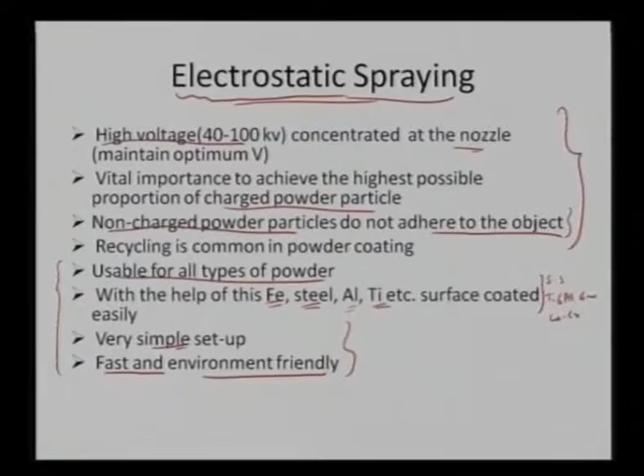So, we have a particular electrode. As powders are passing through it, they get charged. So once the charge is created on the powder particle, right now it is at higher potential, and then it progresses to the lower potential side, and we can have some fans or blowers which can allow the particles to attain certain velocity, or basically to flow from gun to the substrate.

So that is the overall philosophy here, that we apply a particular blower, it carries away the powder particles, and once it is carrying the powder particles, it will encounter the electrode which is centrally located in the gun, and that makes the powder particles get charged, and the flow of air which is blown from the other end carries away the powder particles. Now the powder particles are charged in nature, and once they strike the substrate, they can transfer the charge back to the substrate.

But in this particular process, all the powder particles have similar charges. So there is some sort of electrostatic repulsion, and that electrostatic repulsion is the cause of uniform dispersion of the powder particles. That's what happens in the conventional electrostatic charging system. Overall, it is one of the very simple processes, as we see here: we apply certain voltage here, and then that voltage is carried over by the electrode, which is facing the front portion of the electrostatic spraying gun,

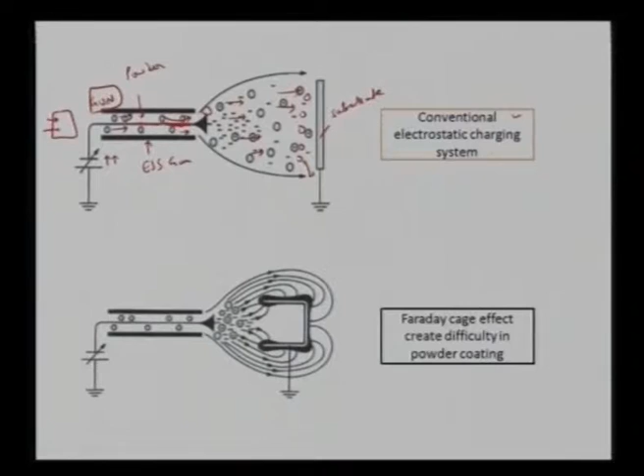But when there are certain crevices, say we had a particular implant substrate which has a certain cavity or some sort of a cage effect, what happens? As soon as powder particles start depositing on the front portion, they now have charge. They are now charged entities. And the second powder particle, instead of getting inside this particular cage, will experience a repulsion from the already deposited powder particle. So it will tend to find a new site for its deposition, and it can find an easy path of travel on the surface of this substrate, not inside of it.

So in that sense, the powder particles which are now charged will try to sit on the top surface rather than the inside surface. And if we want to coat the substrate from the inside as well, that becomes very, very difficult. Initially, a few powder particles can go inside, that will be fine, but as more and more charge deposits on the front portion of the substrate, it will be very difficult for the powder particles to squeeze through and get deposited inside to a larger extent. So that is called the Faraday cage effect, and that can create difficulty in the coating of a particular powder.

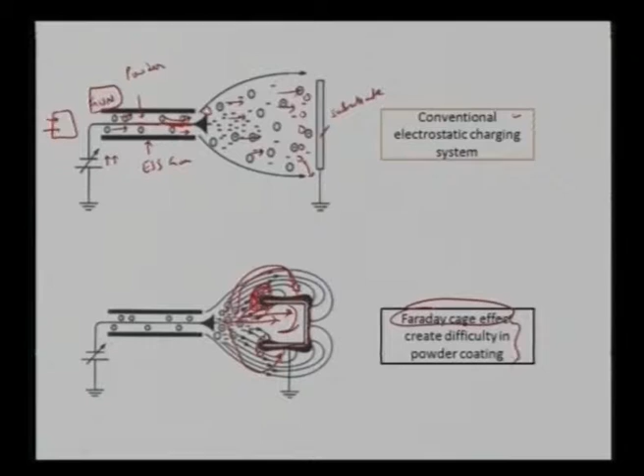So our overall aim is to create a biocomposite which needs to have enhanced mechanical properties, because if you are creating a particular biocomposite, we need it to perform much better than already existing coating materials. So if it is a polymer, we definitely want it to have higher wear resistance as well as higher scratch resistance.

And if possible, we would also want to extend these developed materials as real-life orthopedic implants. So we also need some sort of studies, in vitro and in vivo studies, for the confirmation of the biocompatibility or cytocompatibility of these particular coatings.

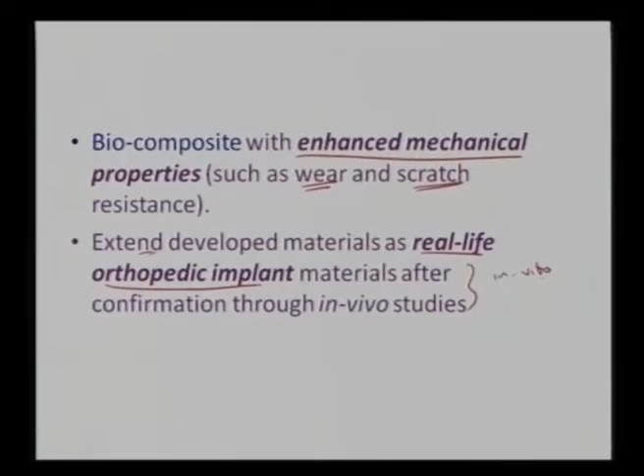And as we have seen in the earlier lectures, surface is one of the very critical components of deciding the cytocompatibility, because any particular environment will come in contact with the surface first. So that is the critical issue in terms of deciding the cytocompatibility. And if these coatings have to be utilized as superior, much more superior in terms of the mechanical and tribological properties, they also have to retain the cytocompatibility at the same time. Only then can we extend them to certain potential biomedical applications.

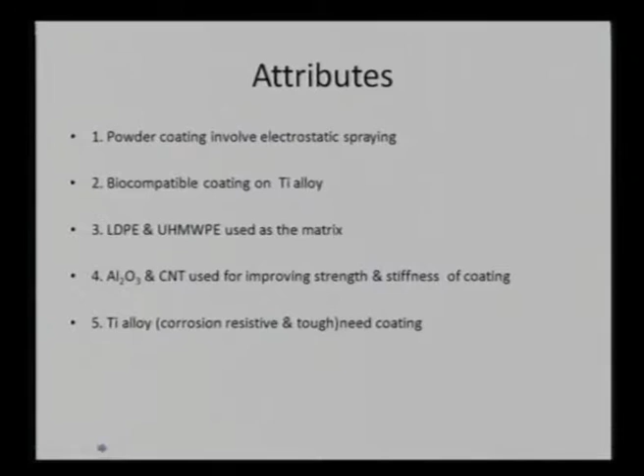So there are certain attributes to it. First of all, we are utilizing electrostatic spraying for the powder coating. Secondly, we know that they need some surface so that they can dissipate their charge. So for that, we need to have a metallic entity where the charges can be taken away. That is nothing but a metallic substrate, which can be titanium alloy, stainless steel, or cobalt chromium alloys. The only required criteria is that the substrate has to be conducting in nature.

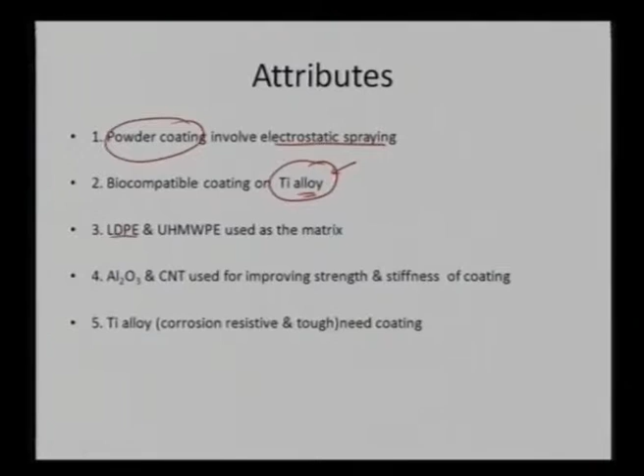Once we have that, we can utilize either low density polyethylene or ultra high molecular weight polyethylene as the main component of the coating. So we are going to deposit a coating which is rich in polyethylene. It can be ultra high molecular weight or low density polyethylene, and we can make that a major constituent of the coating.

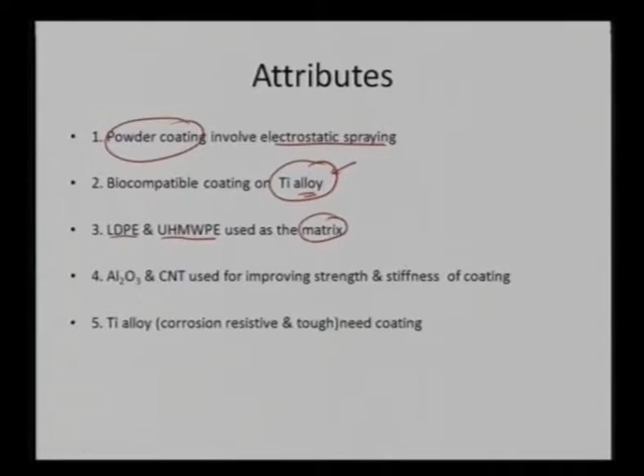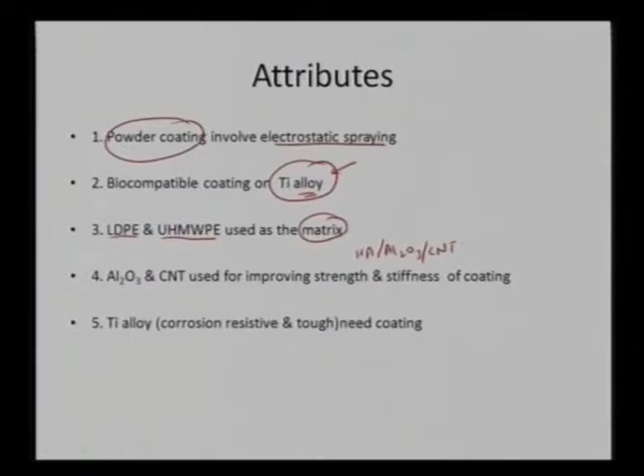And because these coatings are very soft in nature, we also want to increase their wear resistance or tribological properties. So for that, we can introduce hydroxyapatite, we can also introduce some ceramics, such as aluminum oxide, or we can incorporate carbon nanotubes for improving the strength as well as stiffness. So once we have much superior mechanical properties, we can expect that the wear or tribological properties will also enhance with the particular reinforcement.

And again, this particular one is much better because of its superior corrosion resistance as well as its toughness. So once we select a very appropriate biomaterial, we can always do a coating of polyethylene, which is still a biocompatible material, and we can enhance its strength by using reinforcements such as hydroxyapatite, alumina or carbon nanotubes. And their incorporation will vary depending on what kind of applications we are aiming at.

So we know that for the polyethylene matrix, conventionally polyethylene has been shown to be exceptional in terms of biocompatibility, such as in total hip replacements. In THR surgeries, polyethylene has been shown to be a very excellent biocompatible material. But the problem is that polyethylene can degrade over time. That might create some bone loss or hip implant loosening, because once we are losing material, it creates gaps or spaces between the implant and the bone.

So we want the polyethylene coating to survive for a very long time. Generally, we have ceramic balls and a polymer liner, which will always lead to much more degradation of the polymer. So if we want to improve the wear resistance or tribological properties of this polyethylene, we need to incorporate certain ceramics as reinforcement. In this particular case, we may want to create a porous coating so that cells can adhere, or depending on the applicability, we can also provide some lubrication in the porous coating. So that is the deal with this polyethylene matrix.

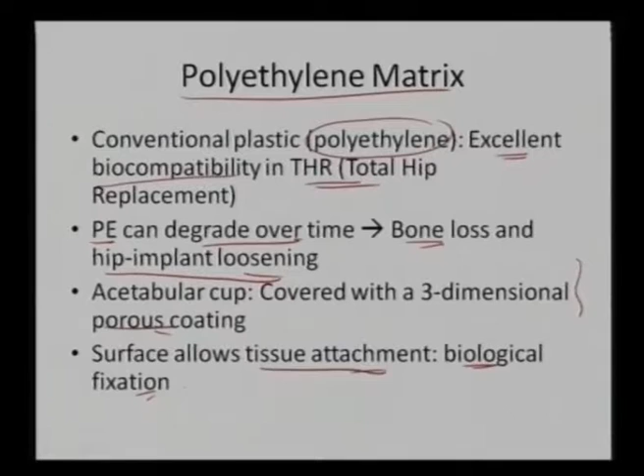At the same time, polyethylene can also allow for tissue attachment or biological fixation. So that is one more advantage of polyethylene: it can allow biological fixation and allow tissues and cells to grow onto its surface. So in this component, we are utilizing ultra high molecular weight polyethylene because it has been shown to be exceptionally cytocompatible in total hip replacements, and it is a very commonly used bioinert material for implants.

But the problem with this polyethylene is that it is limited to only soft tissues. Because of its lower mechanical properties, it is limited to soft tissue implants, and at the same time it has very low elastic modulus and low yield strength.

So to improve those particular properties in terms of strength as well as wear or tribological properties, we may want to add some hydroxyapatite. And hydroxyapatite has shown to be an exceptionally bioactive material. It has a close resemblance to bone and teeth because its calcium to phosphate ratio is 1.67, and because of its bioactive nature, it also supports bone growth. So in certain cases, when we want the bones to get reattached to the implant material and to provide a strong reinforcement, hydroxyapatite comes to our rescue.

So again, it leads to bone resorption and implant loosening in case we get a very poor crystallinity or generation of some secondary phases which are amorphous in nature. So that can also create certain problems in case the processing is not done properly. So a session has already been taken in terms of the overall processing of these bioceramics or even the bioglass materials.

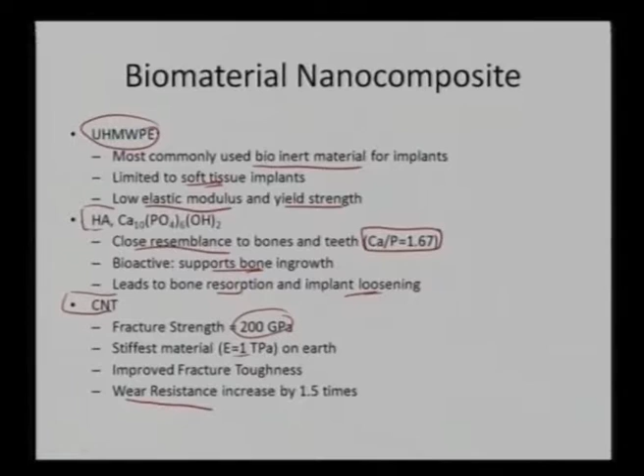So if we are able to reinforce it in a polyethylene matrix, it can result in improved fracture toughness. It will also induce improved strength. It will also improve wear resistance by approximately 1.5 times. So we can see such things have already been reported with the incorporation of carbon nanotubes.

So one more problem here is that our cortical bone has an elastic modulus from 7 to 30, and strength is approximately 50 to 150 MPa. Its fracture strain is only 1 to 3%. So if we want to match it, polyethylene has a modulus of around 1.25. Its density also is very similar to that of a cortical bone, approximately 1. Its strength is around approximately 104, which falls in range. It has a very high fracture strain, as we might require.

And if we start introducing some hydroxyapatite in terms of volume percent, or we start introducing some carbon nanotubes, we are seeing improvement in the mechanical properties in terms of its modulus, and that is now coming back into the regime of the modulus of cortical bone. So what happens is low density ultra high molecular weight polyethylene can start matching the modulus of bone once we start reinforcing it with certain ceramics. So that is the advantage it can provide.

Polyethylene is very light, so it can soon reach the density of a bone, approximately 1 gram per cc. Whereas hydroxyapatite or alumina itself have very high stiffness. So what happens with them is there is some bone resorption, because the body starts thinking that the overall load is being borne by the ceramics, monolithic alumina and hydroxyapatite, once we only have that as an implant. So bone starts thinking they are not really needed there, and because of aseptic loosening we can also see some resorption of the bone itself, because the overall load is being borne by some other material. So that can be a problem.

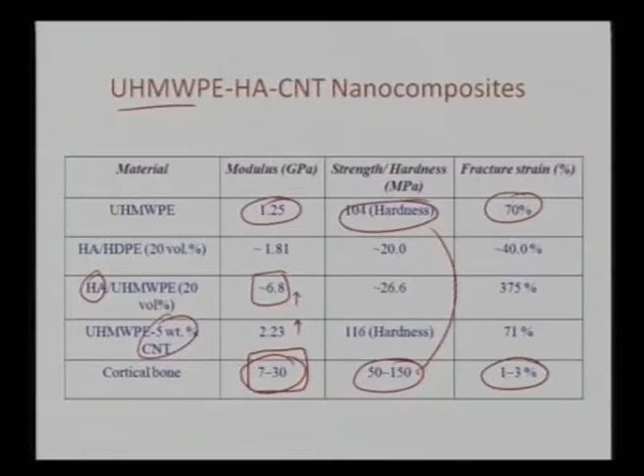That is the reason our polymer matrix can come to our rescue, in that it has a lower modulus and it can match the elastic modulus as well as the strength, and it can have a very superior fracture strain as well. That gives the overall importance to ultra high molecular weight polyethylene reinforced with hydroxyapatite as well as carbon nanotubes.

If they are isolated in some certain location, that particular regime can become much stronger. And also, if they are not dispersed properly, one region will become very weak. So it will also lead to some sort of straining or some sort of stress concentration at certain locations. So that might again be a problem.

Again, people do not know how CNTs or the carbon nanotubes will react once they are in the body environment. So there have been generally two schools of thought. On one hand, carbon nanotube is nano in nature, so it can penetrate through cell walls, it can create some damage, or it can get agglomerated, it can basically get accumulated either at liver or brain or even heart or some other location. So that can even create some problem.

And once anything is in nano form, and if it goes to our lungs, it is very hard for us to take it out. So it can be very toxic, depending on how the CNTs are being introduced into the matrix. But on the other hand, our body is also made up of carbon. So why would carbon be deleterious to our own body?

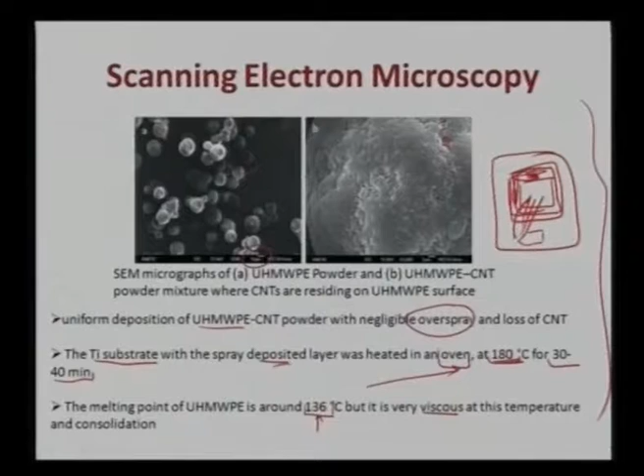In this particular case, the melting point of polyethylene is around 136 degrees centigrade, but it is very viscous at this temperature. So when we want the polyethylene to flow, we need to superheat it to a much higher temperature than 136 degrees centigrade. So here we are heating it to around 180 degrees centigrade, so that it is fluid enough to cover the overall surface of the titanium substrate. So that is the overall deal with the deposition of CNT reinforced polyethylene using electrostatic spraying.

And once we fracture those samples, in the first case when we have only polyethylene, and in the second case once we are reinforcing it with some carbon nanotube. So what we can see here is, once we have only polyethylene, no CNT, we are seeing a very flat morphology.

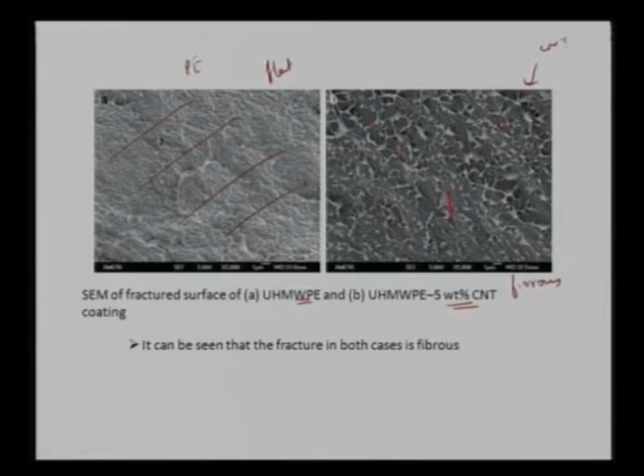But once we have some carbon nanotube, we can see all those dimples, a very fibrous kind of fracture out here. So in this case it is very fibrous, in this case it is a very flat fracture. This directly tells that my coating, which is now reinforced with carbon nanotube, is much more ductile. So that's what is giving me much more advantage, that I can have a very adherent coating, very nice coating, and that also has much higher fracture toughness.

At the same time it should show very good mechanical properties. Because what is happening here is we want the surface to yield once it is undergoing some stresses. So in that particular case we can see that with CNT I am getting a much more fibrous coating which can basically shear off or deform with a particular applied load, and it can sustain a much longer time.

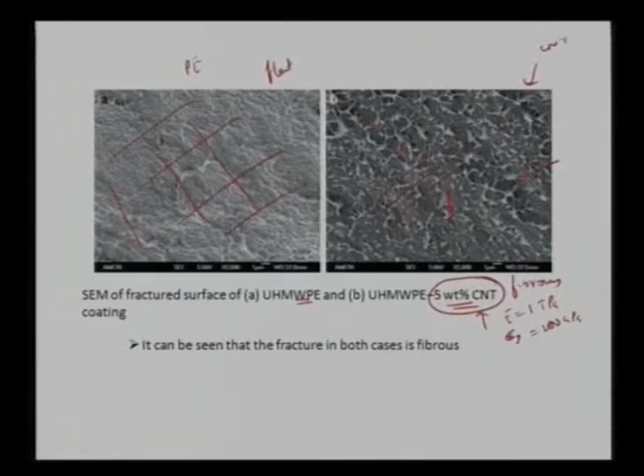So that is the advantage with the addition of carbon nanotube, because carbon nanotube has exceptional mechanical properties: Young's modulus of around 1 terapascal, fracture strength of around 200 gigapascals. So that is the advantage of utilizing carbon nanotube as a reinforcement. At the same time it is also assisting formation of a fibrous structure, which can provide us much more stress absorption in many cases.

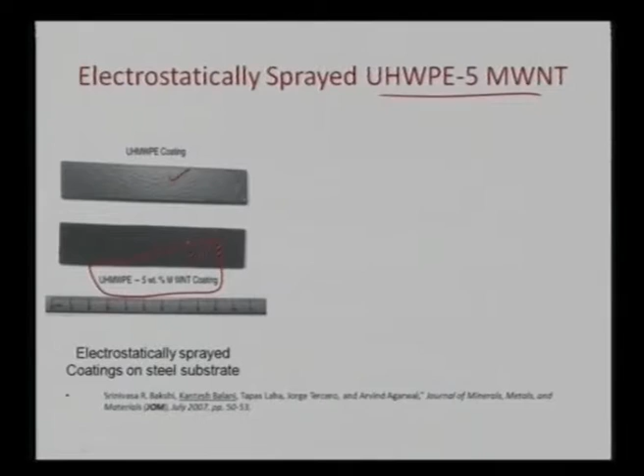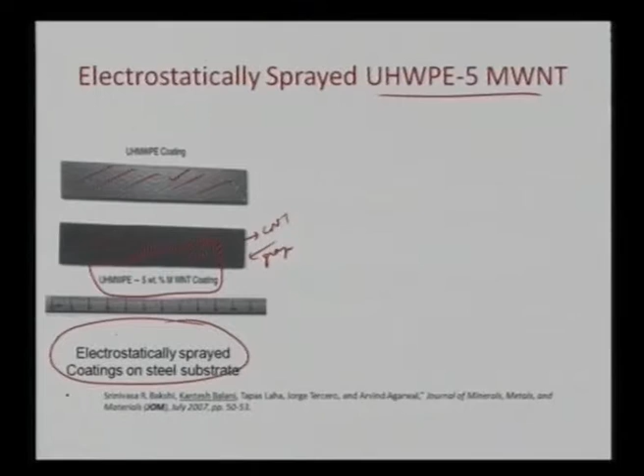This is how the coatings look like. In this case we have utilized only polyethylene with some carbon nanotube. So in this case we have ultra high molecular weight polyethylene, and we have around 5 wt.% of multi-walled carbon nanotube, and the coatings show a very smooth surface finish, as we see here. And in this case, because of CNT, we are seeing a little greyish coating, and these coatings are electrostatically sprayed on the steel substrate. In this case, we utilize a steel substrate, not really titanium substrate, but we can see the overall feel of how the coatings are deposited using electrostatic spraying.

And correspondingly, as we have seen, the fracture part was very different. So in this particular case, with the reinforcement of 5 wt.% multi-wall carbon nanotubes, we are seeing an increase in the elastic modulus by approximately 10%. That is again very substantial, because we are using only 5 wt.% of CNTs, and that is enhancing the mechanical properties or the elastic modulus by around 10%.

At the same time, we can also see improvement in the hardness. This is very marginal, but we can see there is an overall general increase in both the hardness as well as the elastic modulus, marginally, but we can see there is some sort of influence of carbon nanotube reinforcement in the ultra high molecular weight polyethylene matrix.

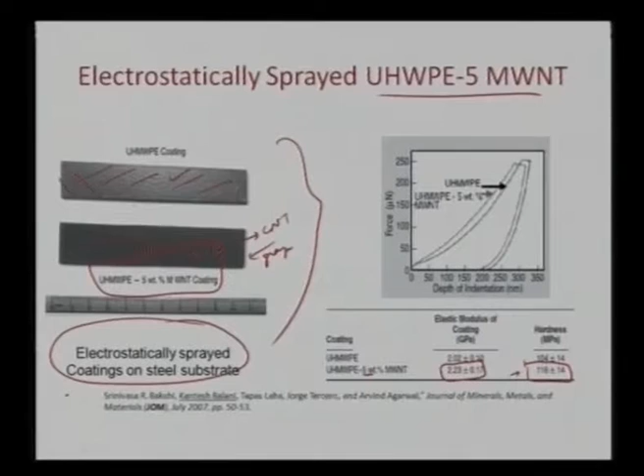So that is what we can see, that electrostatic spraying coatings are very smooth. So we can utilize them as such, because they have a very smooth surface, and aesthetically also they look very good. So we can utilize all these coatings as such in the implant, while they are showing the improvement in the mechanical properties.

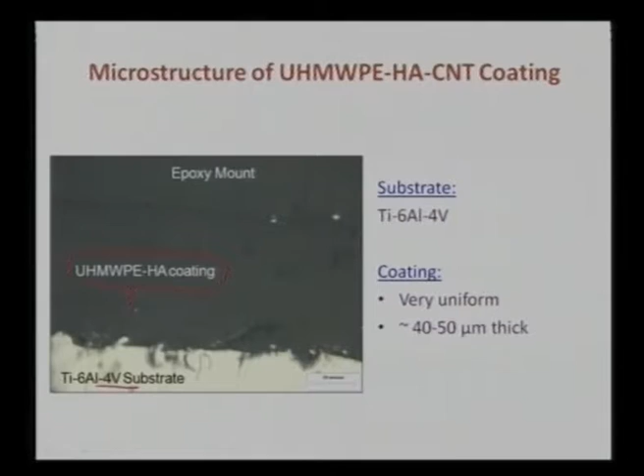Now coming next, we can see that in the second case, we have ultra high molecular weight polyethylene with hydroxyapatite coating. So in this particular case, we have a titanium 6 aluminum 4 vanadium substrate, and over that we have electrostatically sprayed this coating, which is ultra high molecular weight polyethylene reinforced with some hydroxyapatite.

And we can see one very nice observation, that the coating is very uniform. This particular coating is very uniform. The interface is very adherent. We can see out here there is no cracking at the interface. So the interface between the substrate and the coating is very strong.

And later on, this particular part was sectioned and mounted. So we have this epoxy mount, which has captured the coating as well as the substrate. So we can see in this case the coatings are very uniform, approximately 40 to 50 micrometers thick. But the main part is, it is very uniform. We can achieve approximately a constant thickness or a very smooth surface utilizing this electrostatic spraying.

So that is the basic advantage of electrostatic spraying: I can achieve very uniform coatings on a metallic substrate. And mostly all our implants are metallic in nature, because they need to render enhanced fracture toughness, enhanced fatigue life, and such. Basically, they have to take care of the wear and tear and work as the workhorse material. So in that particular case, this process can highly be utilized for electrostatic spraying of certain polymer coatings.

So that part we can see here, that we can achieve a very nice uniform coating on a metallic substrate, which is a titanium 6 aluminum 4 vanadium substrate, and I can achieve a good interface. So I have a very good interface without any cracking.

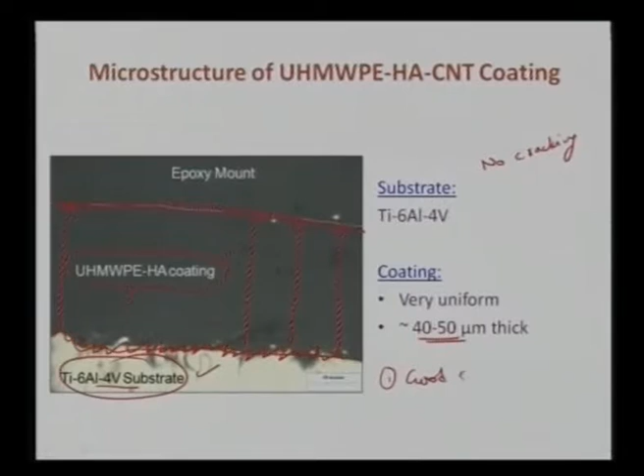Coating is highly adherent coating. And third thing is, I am achieving a very uniform coating thickness. So these are three very nice components which we can really see here, that I have a very good interface, coating is highly adherent, it is not peeling off, and I have a uniform coating thickness. So in that particular manner, I can really see how much coating I really require out here.

But one problem with this electrostatic spraying is, I cannot achieve very high coating thickness, which can exceed say 200-300 microns or so, because my substrate needs to be very highly conducting. Once I achieve a certain thickness of this powder, later on it is very hard for me to keep developing powders on a charged surface, because once we melt the powder it becomes insulating, and powders themselves have some charge, so it will not allow charge to keep accumulating with the electrostatic spraying.

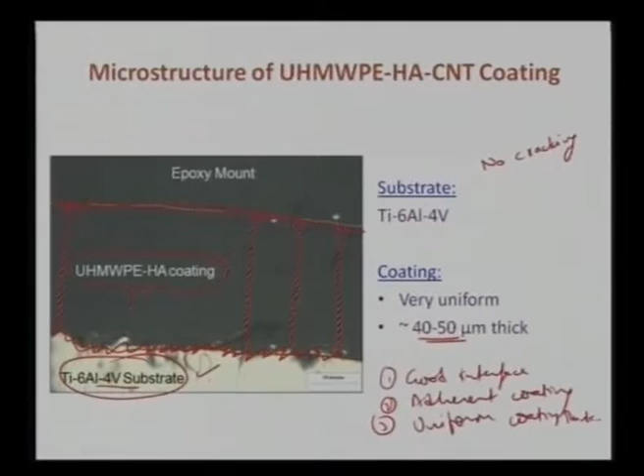So I keep the substrate, I deposit certain thickness of powders. It is not limitless, the process is not limitless. I can achieve only very fine coatings, which can be limited up to say around 150 to 200 microns and not more. That is a disadvantage of the process, but it becomes an advantage for this particular biocompatible coating, because we can achieve very fine, adherent and uniform coating on a particular metallic substrate.

So the overall feel of it is that the first step is the processing of this ultra high molecular weight polyethylene, which is now reinforced with hydroxyapatite and carbon nanotube, and then once we have synthesized those coatings, we need to have some sort of in vitro biocompatibility test, that can come from either cell culture or bacterial culture studies. Once we have done that, we will know what are the potential materials for which we can expect much more enhancement in the mechanical properties.

So for that we can either do nano scratching, we can do fretting, we can also do ball-on-disk testing. And once we can see how we are getting the enhancement of the mechanical properties, we can come to the process optimization by electrostatic spraying in terms of hydroxyapatite content, in terms of any other reinforcement we require. And some other component which might be essential is what might be happening at either the CNT-HAP interface or the polyethylene-HAP interface or the polyethylene-CNT interface. So there can be certain components which can be answered via some computational modeling.

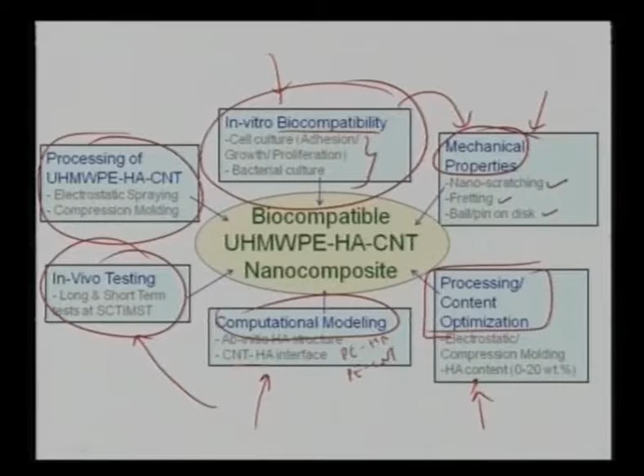At the same time, once we have confirmed from in vitro, from mechanical properties, from the optimization of the composition, we would also want to know what is happening in vivo in terms of both long term and short term tests. So that part also might become very critical in terms of evincing the overall biocompatibility of polyethylene, which is now reinforced with hydroxyapatite and carbon nanotube.

So in this particular case, we can see the overall pyramid of this CNT reinforced ultra high molecular weight polyethylene with hydroxyapatite. So there are certain criteria to it. First thing is the nanocomposite processing. So we have to optimize the process and then synthesize a particular coating or do the spraying part. Then the second part is the mechanical properties. So we would want to know what is happening in vitro and in vivo, and also what is happening to the wear or the tribology of this particular coating, so we can finally select the coating.

And further we would also want to know what is the overall effect of the composition in terms of how the reinforcement is being given by either hydroxyapatite or carbon nanotube, how those phases are distributed. So microstructurally also we need to look at their distribution, how the phases, both hydroxyapatite as well as carbon nanotube, are being distributed in the polyethylene matrix.

Then at the same time, what is happening between the interfaces of all those? It can be hydroxyapatite and carbon nanotube. It can be polyethylene plus hydroxyapatite. It can be polyethylene plus carbon nanotube. So there are certain areas where we would want to look at the overall interfacial compatibility. So this forms the overall pyramid of processing.

How do we process it using electrostatic spraying and be able to optimize first the process, then the composition, and then once we optimize the composition, we would want to look at the mechanical properties. So what is happening at the interfaces, how the phases are now being distributed, and then coming on to the in vitro and in vivo testing, so that we can choose them as potential biomaterials. So this is the overall strategy of developing ultra molecular polyethylene, which is now reinforced with hydroxyapatite and carbon nanotube.

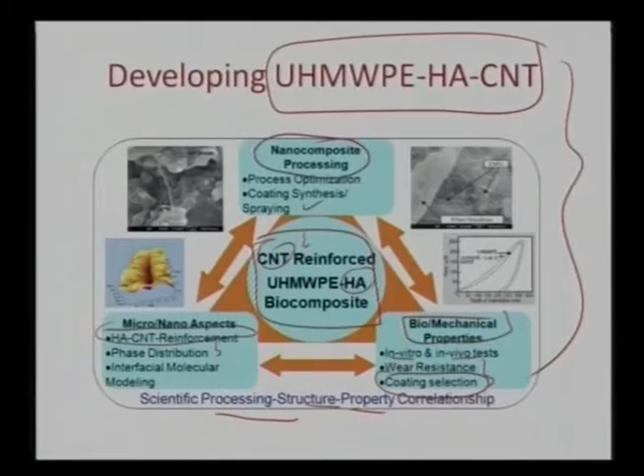So that is the overall scientific processing-structure-property correlation which becomes essential. So that is the overall deal with the development of ultra molecular polyethylene with hydroxyapatite and carbon nanotube. And most importantly, interfacial wear is also one of the very critical components, because once we have surface 1 and surface 2, how do they interact, how is the overall roughness, the overall chemistry, the overall lubrication between the two surfaces will result in how my material will be lost once I have two operating surfaces.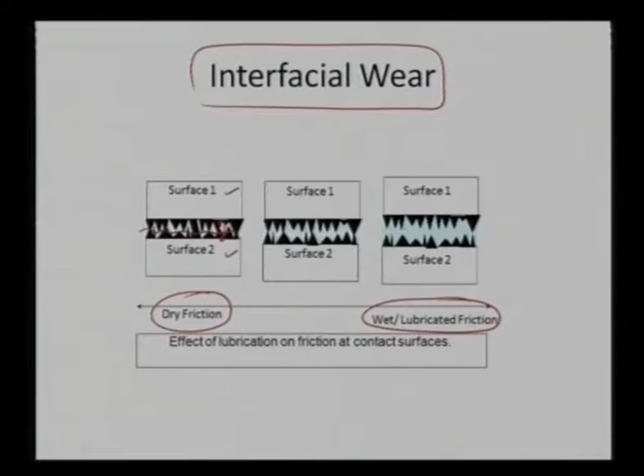So I can have a dry friction once I don't have any particular fluid, or secondly I can also have a wet or lubricated friction. So in this particular case I have some hydrostatic film which can form between the two surfaces, and once I have some film forming between those two, it is only the film which can easily shear off, and once it is shearing off, I will achieve a very low coefficient of friction because the surfaces will flow very smoothly over one another. Whereas in case of dry friction, I don't have any sort of lubrication.

That's how the porosity also comes into the picture: once my surfaces are very dry, they will always have some ridges and grooves, because no surface is atomically flat. So that's how it will lead to some sort of contact between the asperities. Once the asperities have lengths of microns to nanometers, it will always lead to some sort of friction between those two surfaces. And once I have certain friction, it will interlock all those asperities, and with the particular movement, it will start breaking off all those asperities. So eventually, I would want to introduce some sort of lubricant to avoid this friction, so that the surfaces can flow very smoothly over one another.

In this particular essence, when I have much easier shear, I can introduce some carbon nanotube, or I can introduce some ceramic particles, so my wear basically goes down to a very large extent. Hydroxyapatite is ceramic in nature, so the abrasion resistance once I have a hydroxyapatite reinforcement will always be much more superior to that of polyethylene alone. Again, it also depends on the interfaces. If I have a very poor interface between hydroxyapatite and polyethylene, then hydroxyapatite can also come out, and it can start eating away my polyethylene. So I need to have a very strong interface between polyethylene and hydroxyapatite.

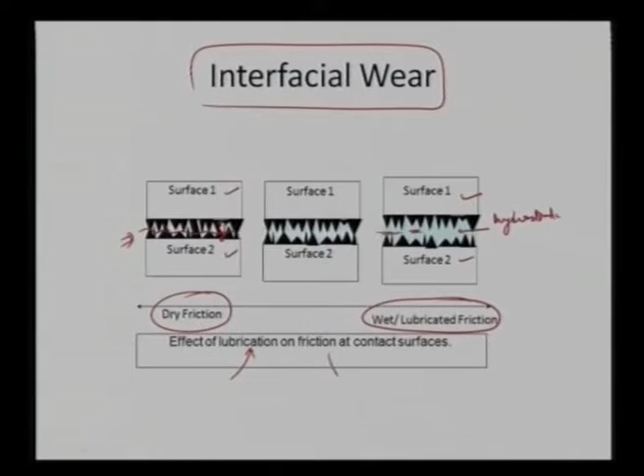CNTs, on the other hand, are much more graphitic, and graphite is also used as a lubricant. So depending on how the interface is between CNT, hydroxyapatite and polyethylene, I can somehow control my wear or the tribological properties. At the same time, I can also provide some sort of lubrication at the contact surfaces to decide the overall wear of a particular interface. So we can see how the composition itself can be much more influential in dictating the overall wear between the two compositions.

In this case, we will see that we have done a nano scratching of ultra high molecular weight polyethylene, which is now reinforced with hydroxyapatite and carbon nanotube. So in this first case, we only have polyethylene. In the second case, we have reinforcement of some hydroxyapatite. So what we can see here is that I have a nano tip.

Then what I am seeing here is the wear volume, which is now calculated by the volume of material being displaced by the indenter tip, both in polyethylene as well as in the polyethylene which is now being reinforced with hydroxyapatite. So we can see I have certain wear volume in polyethylene, but once I am reinforcing with some ceramic, I am getting much higher wear volume.

That is much more contradictory, because once I am reinforcing my polyethylene with certain ceramic, I will expect the wear volume to go down. But what is happening here is that the interface between hydroxyapatite and polyethylene may not be that good. So hydroxyapatite is probably loosening away, and that again is acting as a scratching media for the polyethylene. That is the reason I am seeing much higher wear volume once I am reinforcing with hydroxyapatite.

But once I start introducing some carbon nanotube, like 2 weight% and 4 weight%, I am seeing much reduction in the wear volume. This is happening because carbon nanotubes have very superior mechanical properties. They also serve as a lubricant. They have exceptionally superior wear properties, tribological properties, mechanical properties. At the same time, they have much more lubricating properties. So once I am introducing more carbon nanotubes, I am seeing an overall reduction in the wear volume.

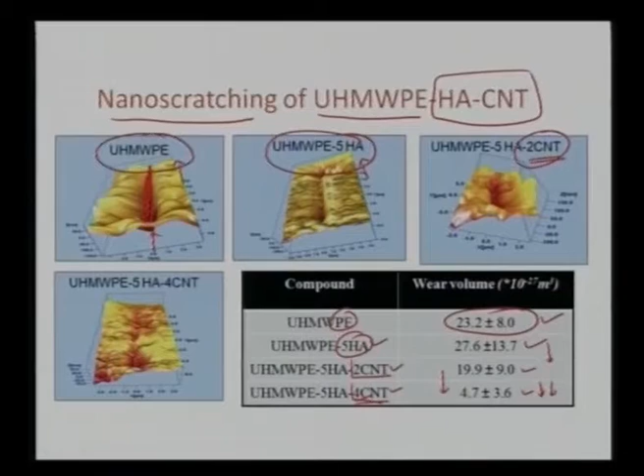That is what we can see, that once we have a poor interface between hydroxyapatite and polyethylene, I am seeing much enhancement in the wear volume, or my wear resistance is dropping off. But once I start reinforcing with carbon nanotube, I am seeing much more enhancement in the wear resistance. So my wear volume is basically going down with the increased CNT content, and that is what is happening with the nano scratching in this particular case.

At the same time, I can see with the increase in the hydroxyapatite, I am seeing increase in the Vickers hardness. That can be expected, because hydroxyapatite is ceramic. Once I am adding some ceramic, obviously my hardness should go up. And with further increase in the carbon nanotube, I am seeing a marginal increase in the hardness as well. So we can see here that wear volume is decreasing with increasing CNT content.

So obviously my CNT is improving the wear resistance. Once I am saying that CNT is a lubricant, I should expect that my coefficient of friction should go down. But we are seeing exactly the opposite. In this particular case, the coefficient of friction is going up with the CNT content. First of all, I had polyethylene; it was showing me some coefficient of friction. Once I am adding hydroxyapatite, I am seeing decrease in the coefficient of friction.

That is happening because at nano level, once I am doing a nano scratching, there is very poor interface between hydroxyapatite and polyethylene. So as soon as I am putting my indenter tip, it is very easy for the indenter tip to plow away the material on the side. So there is very less lateral force in comparison to the normal force. That is the reason I am seeing much reduction in the coefficient of friction for the 5% hydroxyapatite.

Whereas once I am adding some carbon nanotube to it, CNT is introducing much more strength to the polyethylene matrix. They have very superior mechanical properties. So the indenter tip finds it very difficult to displace the material. At nano level, things are very different, and it finds it harder to displace the material. So lateral force goes much higher. That is the reason we can see increase in the coefficient of friction with more CNT content. So it is in agreement with the observed wear volume loss in the nano scratch testing.

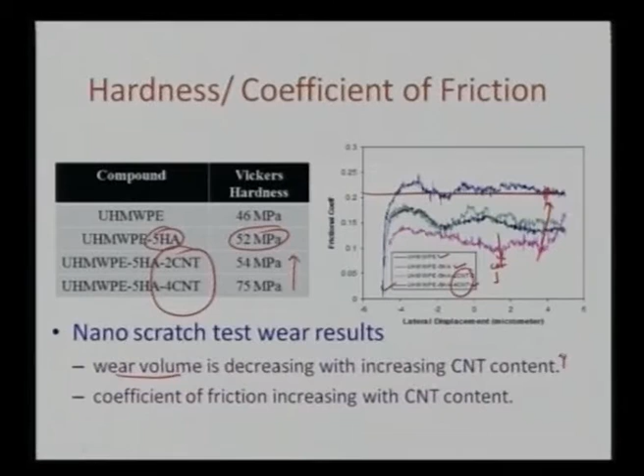So eventually, we can say that electrostatic spraying can be utilized because it is a process in which we utilize a blower to take the powder particles away and get them charged with the electrode. Once it is charged with the electrode, it can disperse very uniformly on a particular substrate because of electrostatic repulsion between them. Once we have that particular entity, we can take it and cure it, and curing can be done at a temperature which is higher than the melting point, so we can achieve a little fluidity in the polymer material, so that it can spread out and coat the substrate nicely.

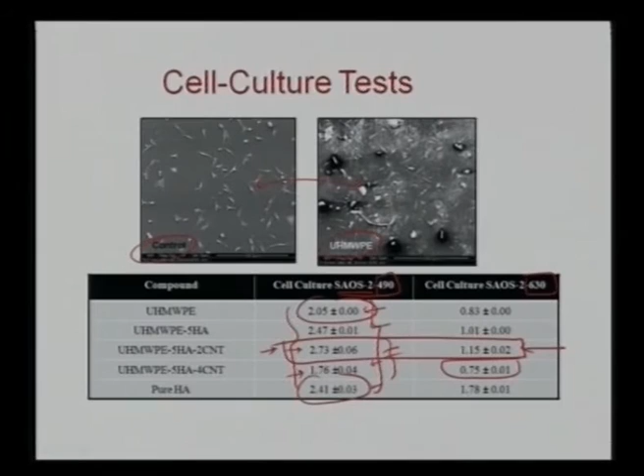So I'll summarize the lecture again. In electrostatic spraying, we are utilizing an electrostatic gun, which can carry the powders and form a very nice coating on a particular body implant material. The substrate has to be conducting in nature, so that is the overall limitation. At the same time, we can achieve very uniform coatings, but we can't achieve very thick coatings using electrostatic spraying. And we are limited only to certain polymers which can be easily deposited and easily cured to give a uniform coating. And the coating thickness is also limited. So that is the drawback of this process.

But again, it is advantageous for bio implant coatings, because those are very fine, and that is what we seek for achieving very good interfacial properties. And once we have a very uniform and adherent coating on the substrate, we can also expect a similar biocytocompatible response from the surface, because the surface is the one which comes in direct contact with the blood or any biological environment. And by altering all these compositions, we can attain the required tribological properties and biocytocompatible properties using electrostatic spraying.